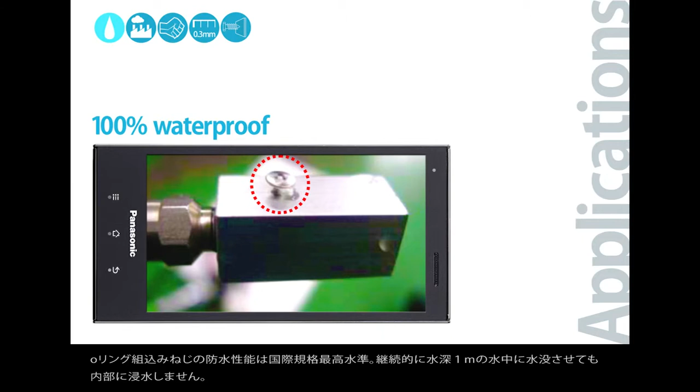One example is the water-resistant smartphone Eluga, manufactured by Panasonic. In the smartphone industry in Japan, where water resistance is becoming a standard, our screws contribute to high water resistance and downsizing. Our screws with built-in O-rings have the highest water resistance in the international specification standard. Water does not get inside even when submerged continuously in meter-depth water.

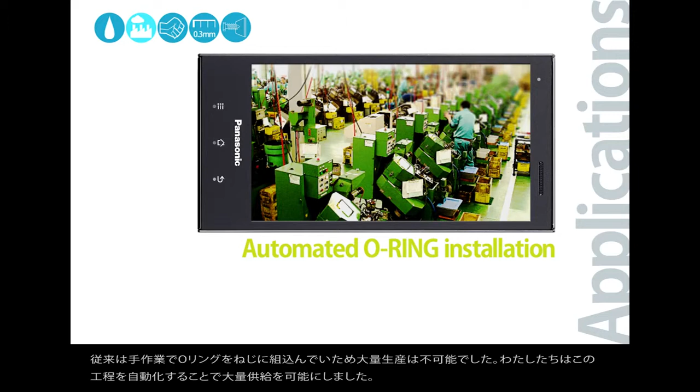O-rings used to be built by hand and it was impossible to mass produce. However, by automating this process, we can now mass produce them.

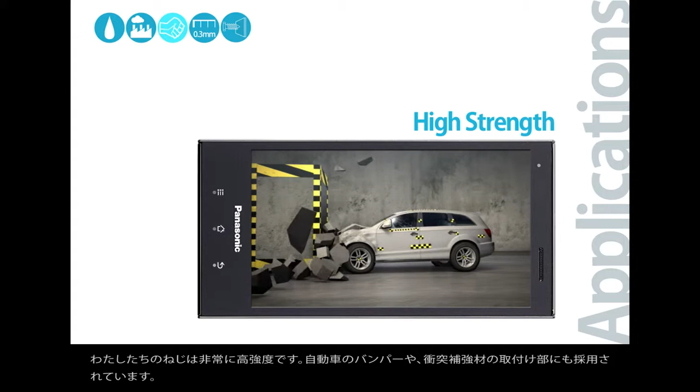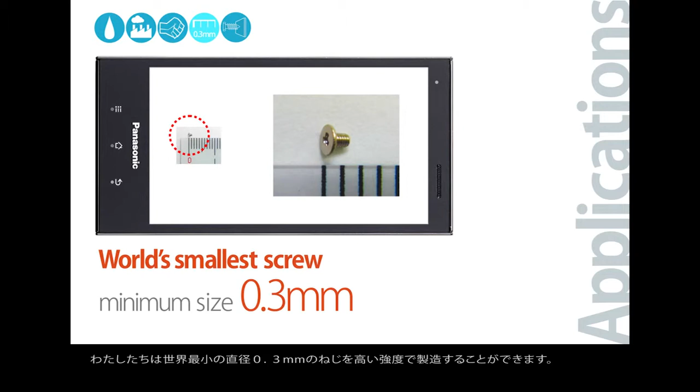Our screws have extremely high intensity. They are used on bumpers of cars and as attachments to collision reinforcement material. We are able to manufacture the smallest screws in the world with 0.3 mm diameter, but also with high intensity. We are proud to have the largest mass-producing system in the world for the 0.8 mm micro screws, which are the most used screws in general industries.

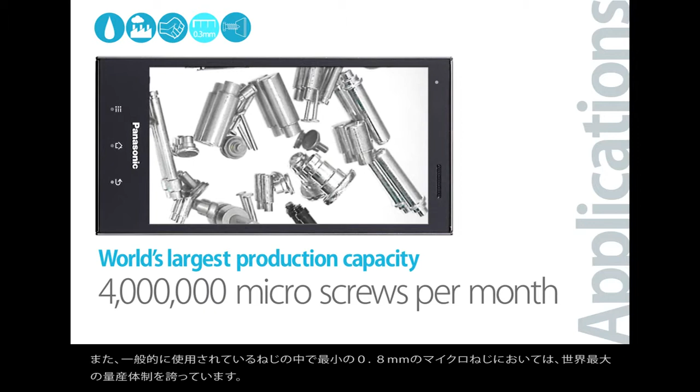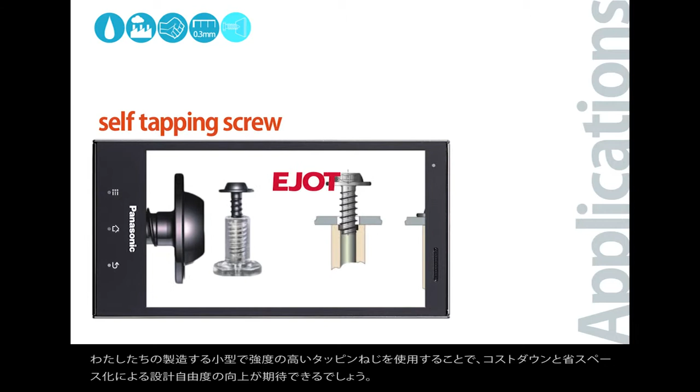Tapping screws for resin, manufactured in collaboration with EJOT of Germany, can connect to resin directly without the female screw. By using our small and high-intensity tapping screws, you can expect an improvement in freedom of design from reduced cost and space.

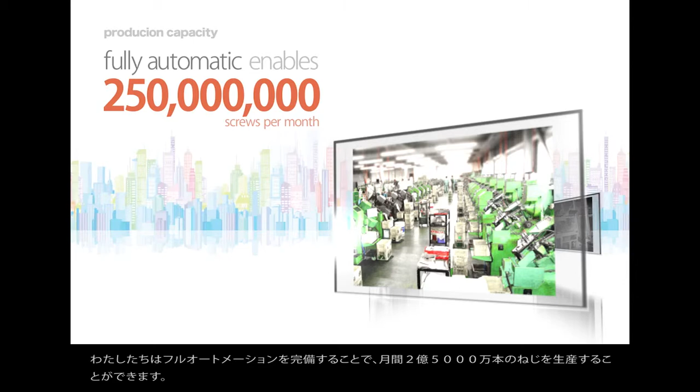Since we have full automation, we are able to manufacture 250 million screws per month. Automation is not only for building in O-rings, but also for the manufacturing and packaging.

Since our foundation in 1977, we have been manufacturing micro screws in large lots. In this current society where downsizing and densification are accelerating in digital devices and others, we hold an established position in Japan as a manufacturer specializing in micro screws.

Our unchanging corporate philosophy is to keep challenging, and we actively work on research and technology development. We also have been successful in reducing the environmental burden and have been approved as green partners by each company.

Ultra Steel Screw is the first practical product of ultra-fine steel structure. Because of its remarkable performance, Ultra Steel allows screws to be ultra-small and highly intense and decreases the environmental burden during manufacturing in half. They are expected to be the next generation screws.

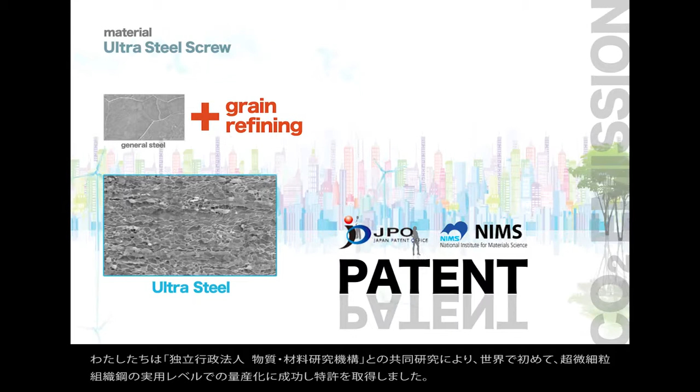It has been known that refining the constituent particles of steel would make it stronger and tougher, but its practical use has been difficult. In collaboration with the National Institute for Materials Science, we were able to mass produce the ultra-fine steel structure at a practical level for the first time in the world.

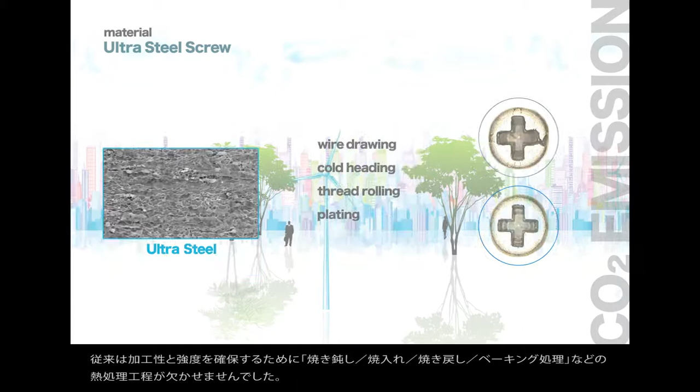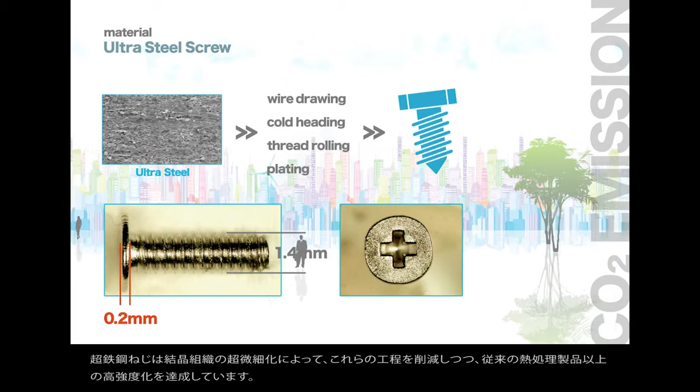Previously, it was essential to do heat treatment processes in order to ensure processability and strength. With the ultra-miniaturization of crystal structure, we accomplished higher strength than the existing heat treatment while decreasing the manufacturing process. Without the heat treatment, we were able to develop the smallest screws in the world.

Although it is easy to enhance strength by adding alloy elements, it lacks recyclability since it is difficult to reuse. Ultra Steel achieves high strength by using ultra-fine grains of standard composition without any alloy elements. Therefore, Ultra Steel screws are extremely high in recyclability.

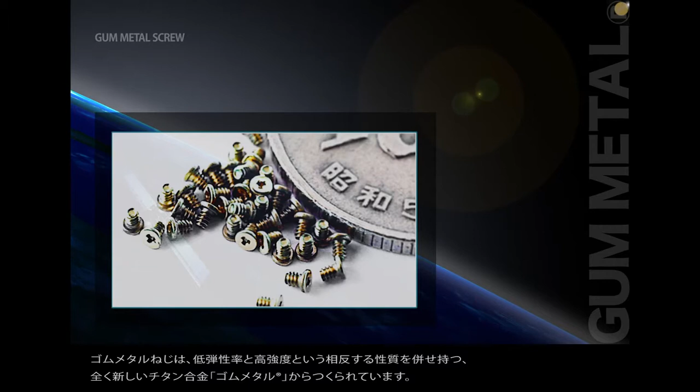Gum Metal screws are made with a brand new titanium alloy called Gum Metal, which possesses the opposite qualities of flexibility and high strength. Gum Metal overturned the conventional image of flexible metal having low strength.

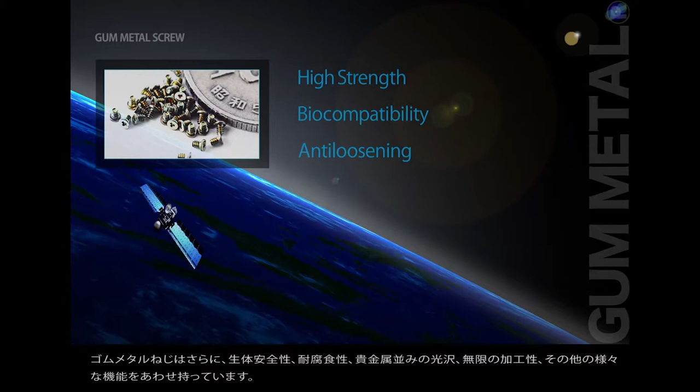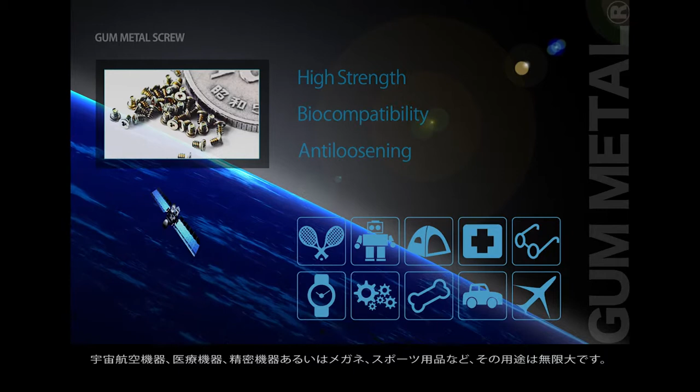Gum Metal screws have various functions such as biosafety, corrosion resistance, a shine like precious metal, and unlimited processability. The use is unlimited, from devices in spacecrafts, medical devices, precision instruments, to glasses and sporting goods.

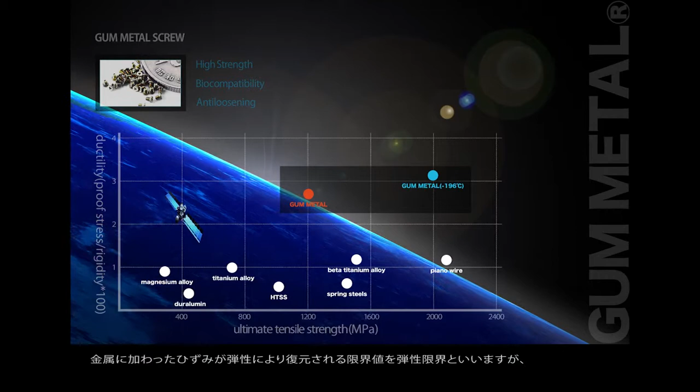Gum Metal is a highly balanced metal. It has high strength against tugging, but also has flexibility. The limit value of restoration from strain forced on the elastic metal is called elasticity limit.

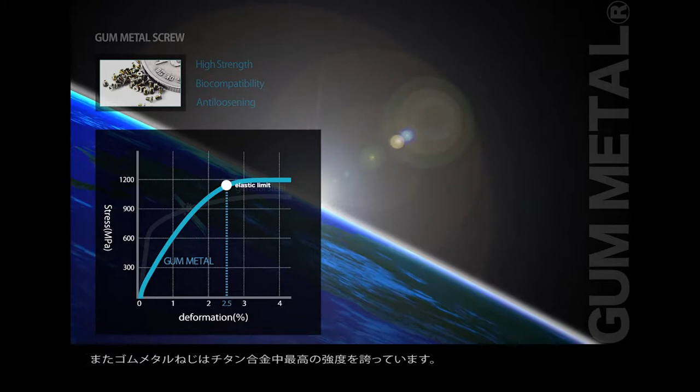The elasticity limit of gum metal is no comparison to previous steel. Gum metal screws have the highest strength among titanium alloys.

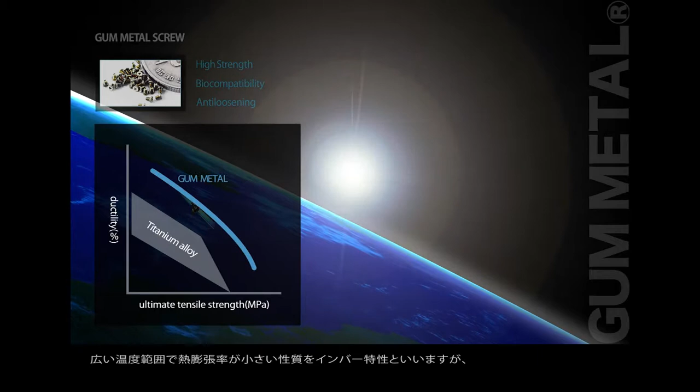A characteristic that has a wide temperature range with a small coefficient of thermal expansion is called an Invar characteristic. Compared to the standard Invar alloy, gum metal has this Invar characteristic with an extremely wide temperature range.

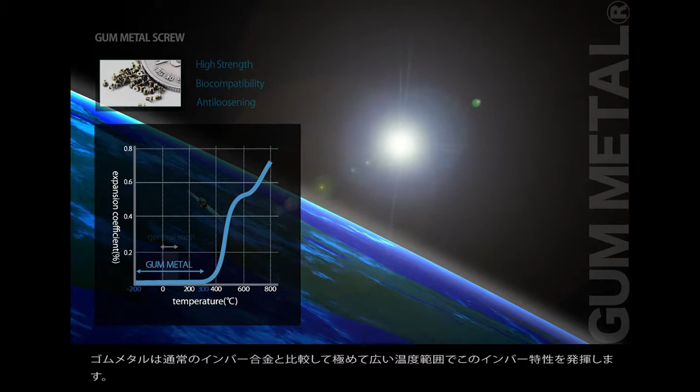The processing rate of gum metal is 99.9%. For example, a material with 30 mm thickness can be flattened to 0.03 millimeters.

A characteristic that has consistent flexibility with a wide temperature range is called an Elinvar characteristic. Gum metal has Elinvar characteristic with an extremely wide temperature range. We are able to correspond to specialized needs of our customers by using gum metal as screw material.

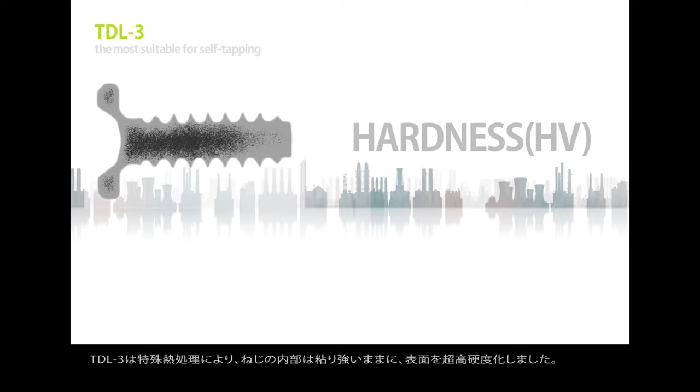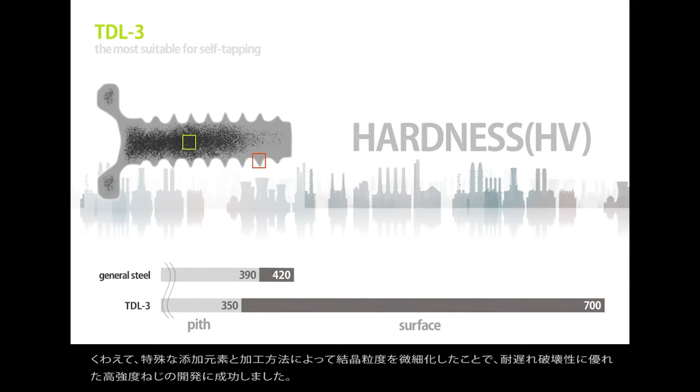For the TDL3, with specialized heat treatment, we made the surface extremely hard while keeping the inside still elastic. In addition, we were successful in developing high-strength screws that are resistant to delayed fracture by refining the grain size with specialized elements and processing method.

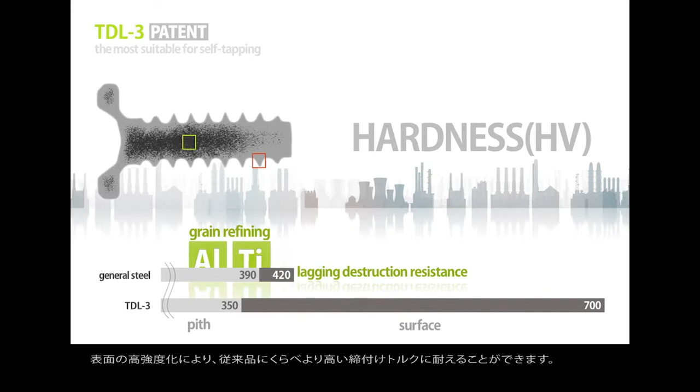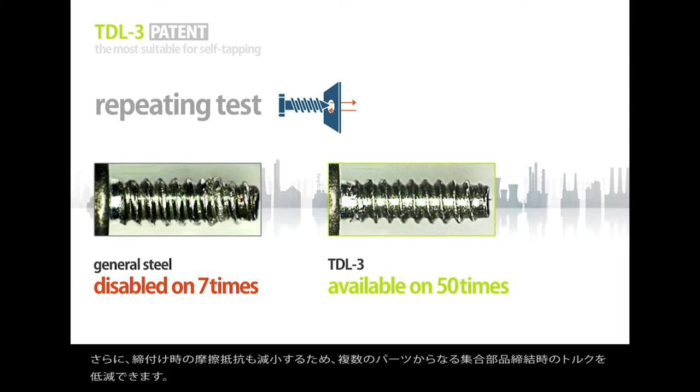It is surely the best solution to the strength problems microscrews tend to have. By enhancing strength on the surface, it can resist a higher tightening torque than previous products. Furthermore, since it reduces the friction resistance during tightening, it can reduce torque on tightening modules that consist of multiple parts. High-strength screws have overcome the risk of delayed fracture by refining the crystal grain and enhancing the toughness.

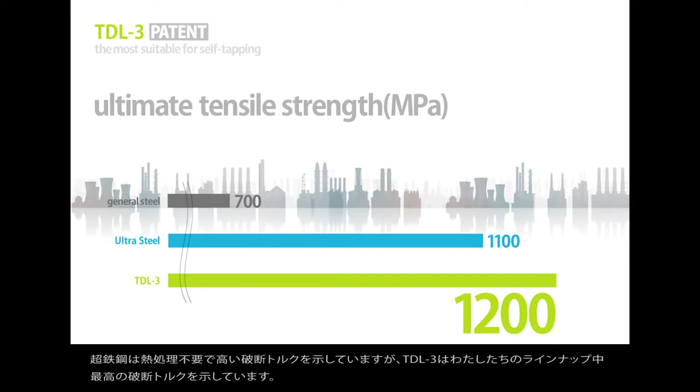Although ultra steel indicates high fracture torque without heat processing, TDL3 has the highest fracture torque in our lineups.

Delta PT is a tapping screw form for resin developed by EJOT in Germany. Since it can be tightened by making the pilot hole in the resin, it can reduce the cost and space by not requiring the processing of a female screw or nut.

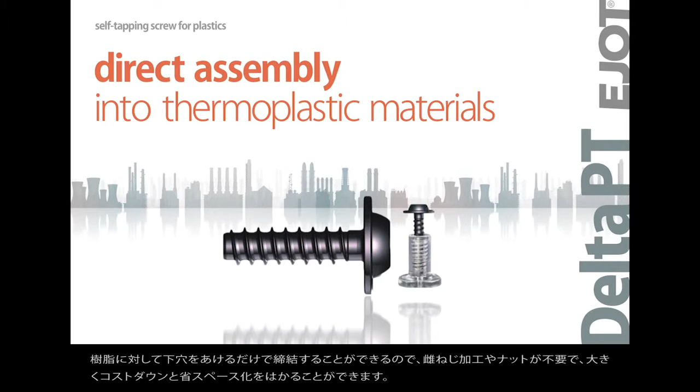Delta PT has an extremely unique thread ridge and thread root, and they can minimize the damage on the resin material when it's tightened. It allows repeated use and thin hub design.

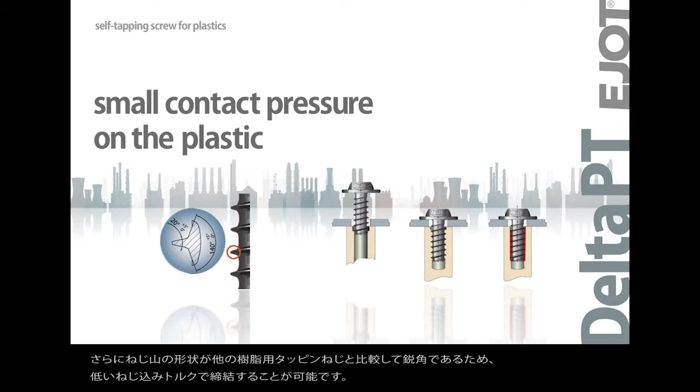Furthermore, since the thread ridge is sharper, it can be tightened with lower screwing torque. Since the screw has a large contact area on the resin, it has extremely high locking effect.

Delta PT is now the de facto standard of self-tapping screw for resin used in the automobile industry in Europe and America, and is used widely in various parts of cars.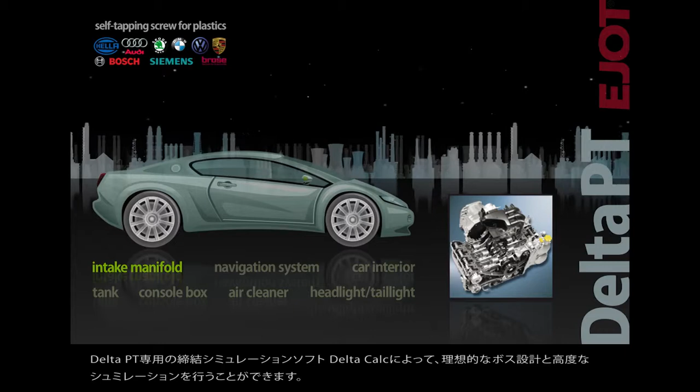Using a tightening simulation software, Delta Calc, specialized for Delta PT, we can do accurate simulations for the optimal boss design.

Our screws are small, rigid, completely waterproof, and self-tapping. It simplifies designs and processes and will allow cost reduction in your operations. Our environmentally green next-generation screws can help you solve issues and stride to the future.